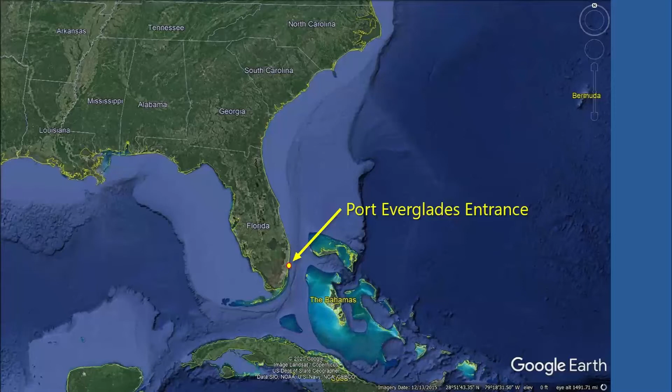So Port Everglades, for those in the room, most everybody's familiar with where this is. It's in Southeast Florida, in the lee of the Bahama Bank, so the wave conditions in this portion of the world are not quite as active as they are in other areas of the east coast of the U.S. Port Everglades is located in southern Broward County, between Fort Lauderdale and the city of Dania Beach. It is a federal navigation project that is hardened with jetties on the north and south side.

The spoil shoal is the product of a 1962 channel expansion event, where instead of going to the ODMDS or other offshore disposal features, the material was simply side cast to a site about 800 feet north of the inlet in a large mound offshore of the beach. But through time, the waves and currents in this area have pushed this rubble mass toward the beach, and it has welded to the shoreline, which is an important part of planning and developing the sand bypass project.

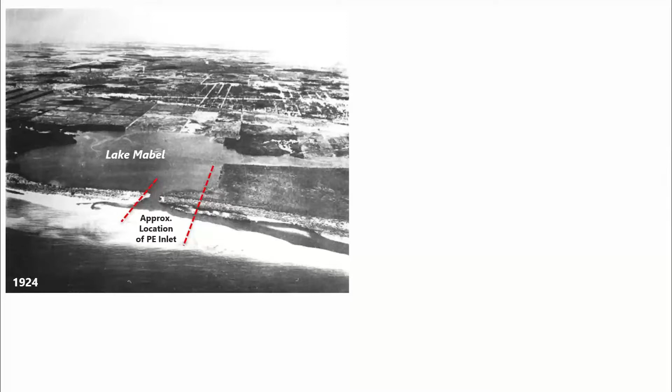Port Everglades is a man-made inlet that was cut to connect the ocean with Lake Mabel back in the mid-20s. You can see here the construction of the jetties themselves. At that time, there was an inlet to the north called New River Inlet, which closed after they opened Port Everglades. But some of these features that you see in the photograph here from 1928 are still part of the inlet infrastructure.

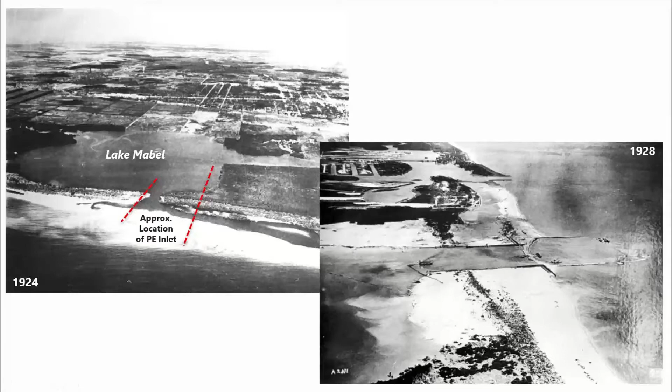So the reason for the sand bypass project is that no sand goes across the inlet naturally. Sand is accumulating on the shoreline to the north or falling into the inlet, where most of it is disposed of offshore, and no material gets to the downdrift beach naturally. So we've had an offset, with accretion to the north and erosion to the south, and we want to rectify that to the extent we can with this project.

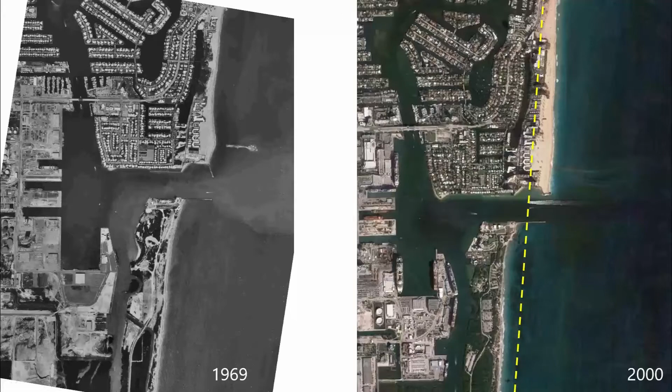So we've divided the activities associated with the sand bypass project into 3 principal components. We have a dredging component that will include several actions.

The first action would be recovery of some granite boulders that are a relic from the 1980 jetty realignment, where they didn't completely remove all the boulders that are part of the old jetty alignment within our project footprint.

Some limestone boulder removal will go to the ODMDS. But the principal pieces would be the sand trap excavation, with disposal at the ODMDS and to the beach to the north, where we're trying to place as much of the available beach-compatible sand as possible and keep it in the beach system. We believe we have the opportunity to put some of that material back on the beach to the north to accommodate the performance of the project.

And then removal of a portion of that rubble spoil shoal that was created in 1962. So these are the main activities we believe would be associated with dredging type activities, and I'll explain each one as we go on.

The next is rock work. As part of this, there's extensive improvements to the jetty. We need to extend it to accommodate some potential effects this project will have to the shoreline to the north. We want to minimize the net landward translation of the shoreline following the removal of the rubble spoil shoal and the creation of the sand trap.

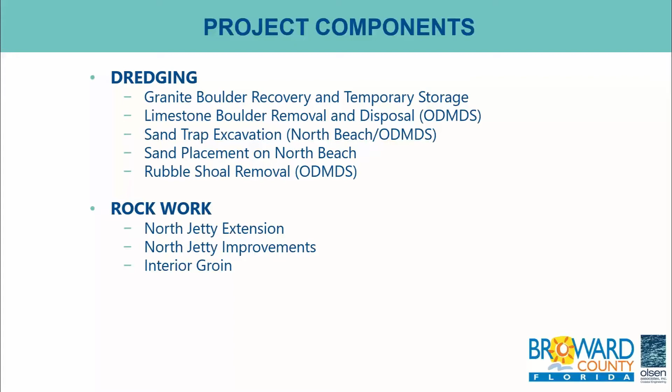We want to add elevation and tighten the north jetty. It's very porous and not very effective at retaining sand on the beach to the north. Those conditions need to be improved, and we're going to construct a small interior groin in that jetty notch. You'll see where all these pieces are relative to one another in just a second.

And then the last thing is what we're calling the environmental section. These are efforts similar in scope to some of the other things like the rock work, where we're going to need to construct a boulder barrier out of limestone rock, and about half an acre of mitigation reefs made of limestone boulders, plus some rubble clearing in that rubble shoal removal area.

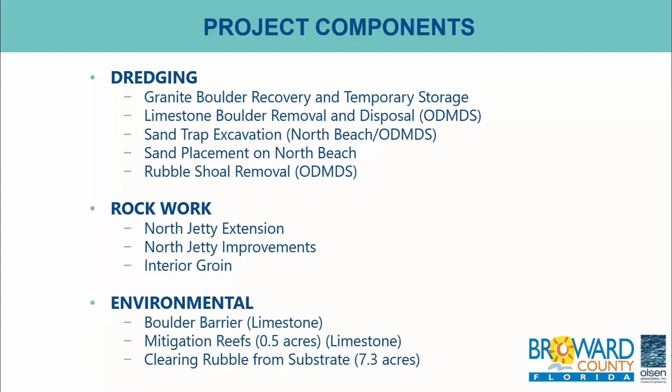We're attempting to recreate some substrate, some reef foundation that was covered by that 1962 project. We believe there could be environmental benefits associated with the project by re-exposing that substrate, and that's another part we are categorizing as environmental.

So turn your head to the left, so north is to the left now. I've flipped the inlet on its side. I'll give you a second to orient yourself - you can see Fort Lauderdale on the left, the south side of the inlet, South Jetty's on the right, and the inlet channel runs up and down in this configuration.

So this is from our plan sheets, and the purpose of the sheet is to give you a summary of all the elements. I'll quickly go through these in this format to begin with, and I'll do it in a different format next, just so we can all get on the same page with what each of these pieces of the project are.

Okay, the first thing is recover the remnants of the old jetty foundation. If you remember, pre-1980, the jetty had a southeast alignment, and they moved it to the north, to due east at the seaward tip. They removed a lot of that material to reconstruct the new jetty alignment, but left a lot of it in place, so that remaining material needs to be recovered.

There are also some limestone boulders. The source of these isn't exactly clear, and I can show some photographs of these in a minute. These boulders need to be recovered and disposed of in the ODMDS.

Then we construct the sand trap, the major feature. This is the configuration of the sand trap, and you can see it's not just a rectangular box, but has an odd shape to it, which is very purposeful for the purpose of collecting sand that will ultimately be directed toward it once we remove the rubble spoil shoal.

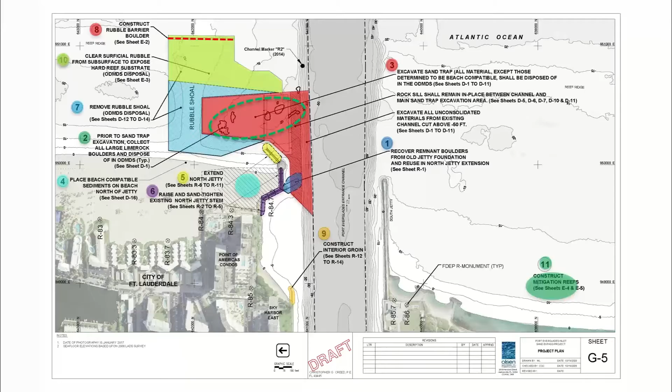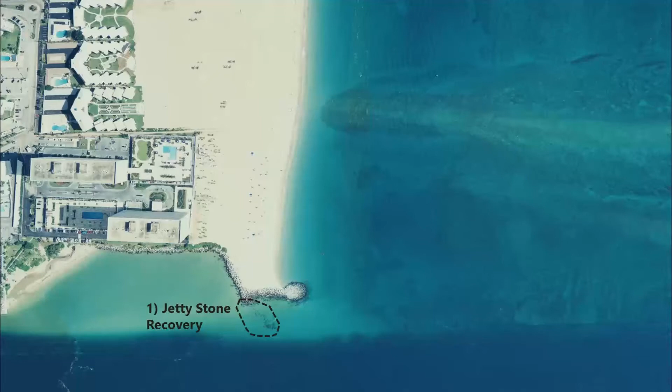So let's just run through this one more time. North is up again, and this puts it in perspective with this nice clear photograph we have. You can even see some of the jetty stones underwater there, peeking through the sand. So that's where this material is. We will want to recover these stones and reuse them. These granite stones in this area would not go to the ODMDS.

Then the limestone boulders we talked about are generally in the circles here. These would go to the ODMDS. And we build the sand trap, so you can see the purpose of getting rid of these boulders now. We have a conflict between where these existing boulders and jetty stones are and where we want the sand trap to be, and we have design elevations for the trap. So we need to clear these materials from the footprint of the area.

Beach disposal, this is the general location where we replace the sand, for whatever material is available. It's possible there won't be any sand available at the time. This is going to be an adaptive management type thing as we go into the construction process, understanding exactly how much of this material might actually be available. The O&M project may pretty much clear everything that we would have available to us.

Then we would do the jetty extension. You can see its relative location in this depiction to the sand trap. We're going to rehab the existing stones by raising the elevation and tightening them.

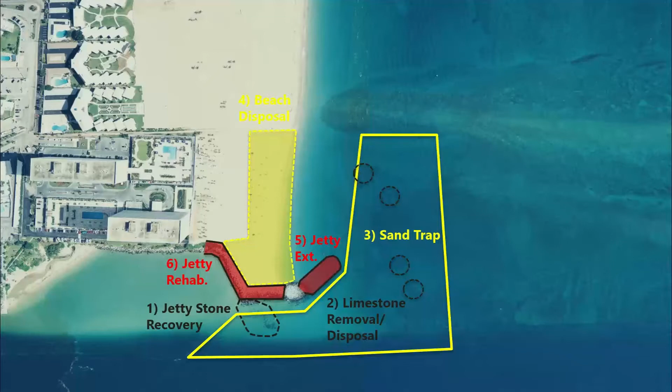So this is a nice summary of all the pieces of our project, presented more or less in the order that we anticipate they should be constructed. There will be some limited sequence of work in our specifications, but there will be flexibility on when things can be constructed. There are some goals we have with the order of work that we'll want to identify in our specifications, but we will be willing to accommodate the contractor's need for a particular order of work.

So for example, you could build the mitigation reefs first. You could build those anytime you want, because they're not in this place here. However, we would like the sand trap constructed before we construct the jetty extension. And that's just two examples.

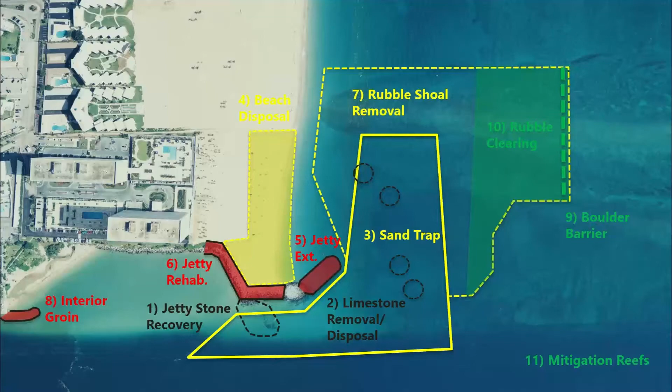So again, just some nice photographs of Port Everglades, what it looks like today. You can see the North Jetty. This is looking to the north. You can see the rubble shoal just barely underwater, the North Jetty, the interior notch, and the interior beach.

Another point to make here is the fact that this is located in a highly developed area, and an area of high use from a navigation standpoint, with the commercial port and the federal navigation project adjacent to the project area.

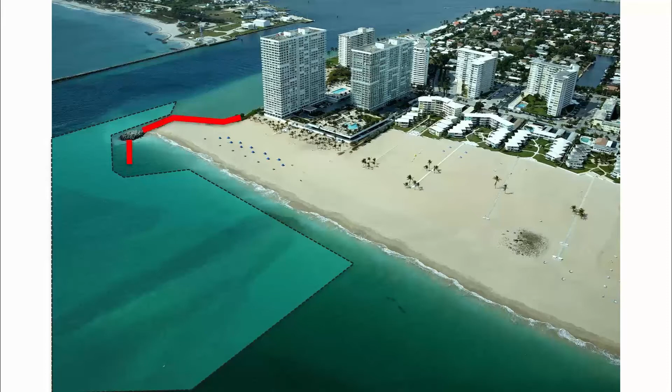So the general area of our project here, again, just another look at it. You can see the footprint of where the dredging would occur and the jetty improvements, but just to give you a perspective of how close some of this work is to some pretty highly developed areas.

So let's get into the individual pieces. I'll go into more details of each one of those things that I outlined previously to talk about our goals right now with what we want to do.

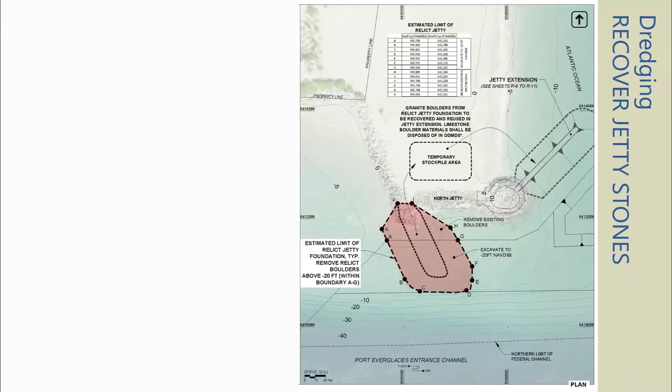So this is the jetty boulder recovery plan, and we want to recover as many of these boulders as we can from this footprint, put them in, and this is what it looks like. If you look, this is looking along the existing jetty to the west toward the port, and you can see just a little perturbation in the jetty here.

This is the old part of the jetty, and these stones would be recovered, put on the beach or put on the jetty for subsequent use elsewhere. These are appropriately sized jetty stone, and we feel that we have the opportunity to reuse this material just like they did in 1980.

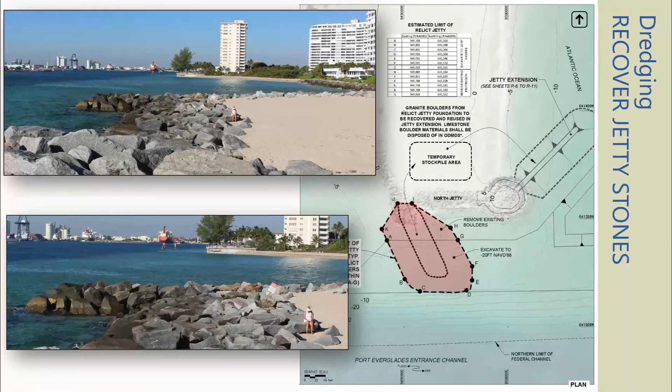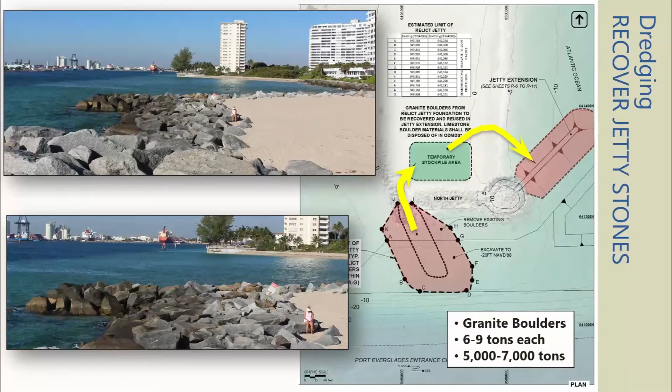So we believe there's about 5,000 to 7,000 tons of these things. Each of these stones weigh an estimated 6 to 9 tons each, and they're made of granite. We would move this material to a temporary stockpile to be determined, for subsequent reuse in the jetty extension, most likely, or other areas as may be needed.

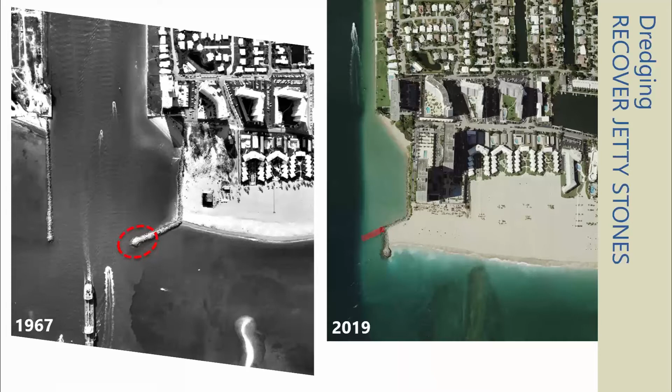It's just to give you an idea of where the old jetty stones are. This is a depiction of how the jetty realignment occurred in 1980, using a 1967 photograph and a more recent photograph from 2019. But it was that seaward end that pointed toward the southeast.

The port is to the top now, ocean to the bottom. In the 1967 photograph, you can see the spoil shoal here that had only been in place for about 5 years at the time, and had not connected to the beach. So this rubble material has moved westward over that time. It's unconsolidated material. But you can see how they repurposed these jetty stone for a more eastward alignment of the jetty at the time.

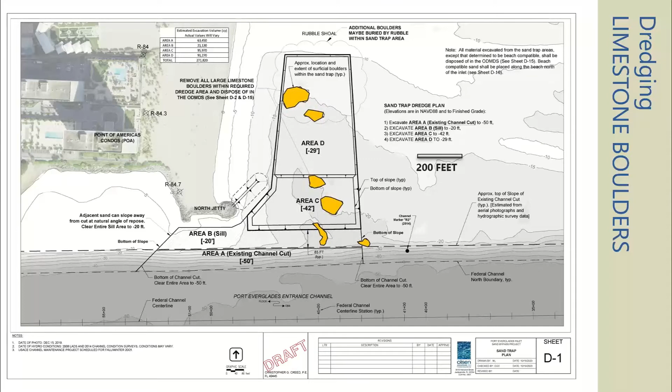So let's talk about the sand. Next to the limestone boulders, before we start excavating the sand trap, we want the contractors to be aware that there are boulders in the way that might not be compatible with the equipment that you might want to build the sand trap with.

So we have authorization to remove these boulders and put them in the ODMDS. The first step would be to collect any of these larger materials for disposal to get them out of your way. We worked with the agencies to identify that ODMDS disposal might be the most cost-effective thing to do with these boulders, and so that's what we've been allowed to do.

Just to put this in perspective, you can see here I put a scale that's about 200 feet in length to give you a sense of the size of the sand trap, just to kind of get your eyes fixed on the scale of everything we're talking about.

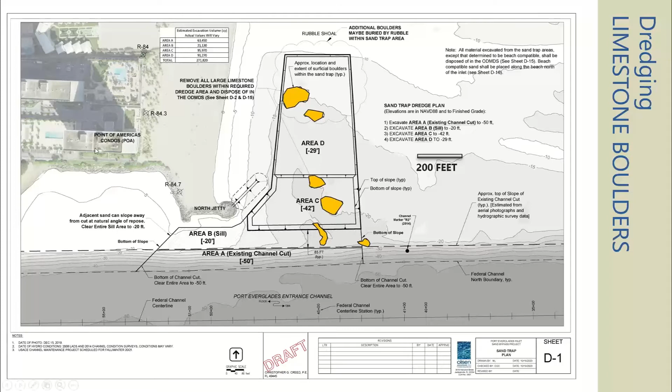So here again, you can see the Point of America's condominium over here to the left and where the sand trap will be located. Then these are some photographs of the boulders.

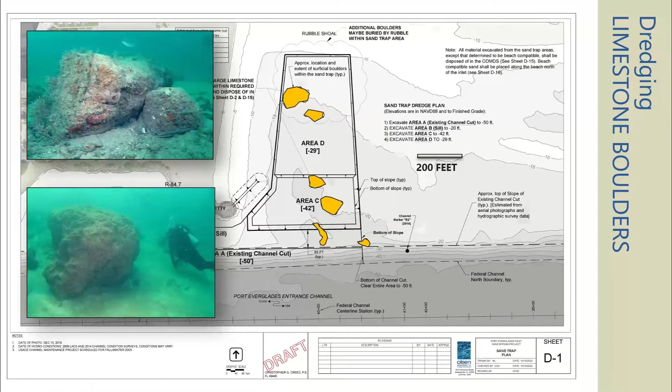All of this would go to the ODMDS. So now let's talk about the sand trap. The sand trap is not only odd shaped in plan form, but odd shaped vertically as well. We have 4 areas that we've identified in the sand trap, and they have specific purposes.

We were not able to open this sand trap up to the channel because of hydrodynamic issues associated with removing the channel wall and ship use in this channel. And so we are required to leave the channel wall in place, and we've created through design a channel wall that would remain, that we believe will be stable from a geological standpoint, for the purpose of maintaining the channel wall.

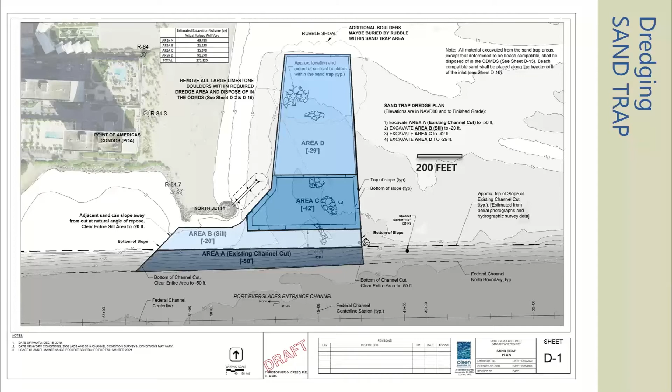And then there's an area C, which would be down to -42, and then area D down to -29. The reason these 2 areas are different: -42 is we're trying to maximize our sand storage capacity in the sand trap, but the area D to the north, we didn't dig all the way to -42 to minimize risk to the beach slipping off into a very deep area. So although it seems very odd, each of these are very purposeful footprints and elevations.

So we believe, based on the current conditions, not knowing how the O&M would affect what's going on in area A, the materials are comprised of sand, rubble, and solid rock, and we believe it'll be about 280,000 cubic yards of material. We don't think it'll be much more than that. The beach compatible sand would go to the beach to the north, and everything else goes to the ODMDS.

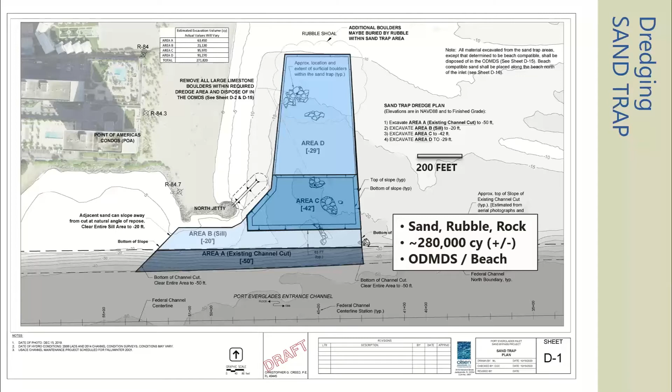Then the sill, area B, is next. Then the next sand trap area C, and then D. And further to the right is the rubble shoal removal area. We'll talk about that later. But this is just 2 depictions of what that cross section looks like of those 4 different areas of the sand trap.

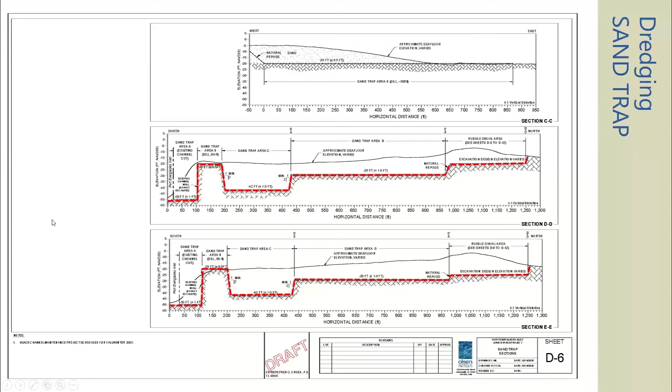Let's talk about geologic conditions. We've got a very robust data set of cores that have been taken down to at least -50 feet throughout this area. It's been a long design process. We originally wanted to blast to do some of this work because of some of the harder material at the deeper elevations. We've redesigned the sand trap recently with the goal of staying above the hardest material to make this sand trap constructible without blasting, because we were unable to secure blasting permits because of the proximity of this project to adjacent infrastructure.

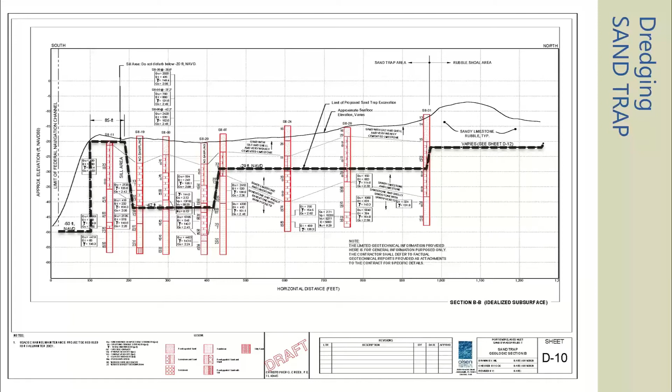But to give you a very general idea, here's again the cross section from left to right, showing the sill to the left and moving through the deeper areas, -42 to -29, from left to right. We have sand, silt, and weakly cemented limestone in an upper layer. To the far right is the rubble shoal. But all of this is expected to be mostly unconsolidated material that would be easily excavated.

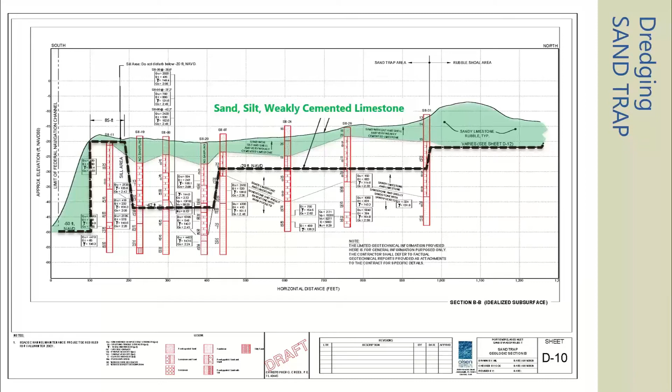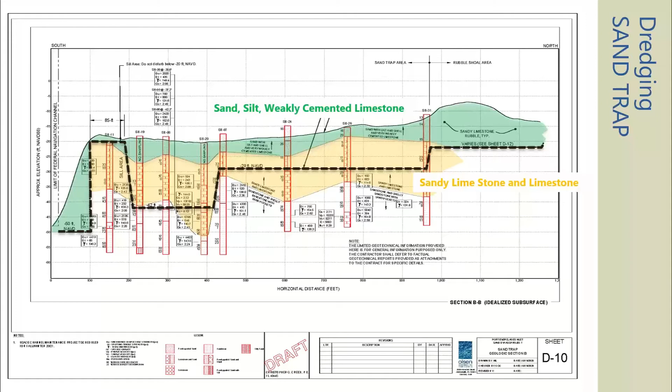Then we run into a zone where the rock material is consolidated, and it will take breaking to remove this material. Mostly sandy limestone and limestone, and relative hardnesses are not quite as high as exists at the deeper depths. I won't get into the hardnesses right now, but just know that as we increase in depth, we do increase rock hardness.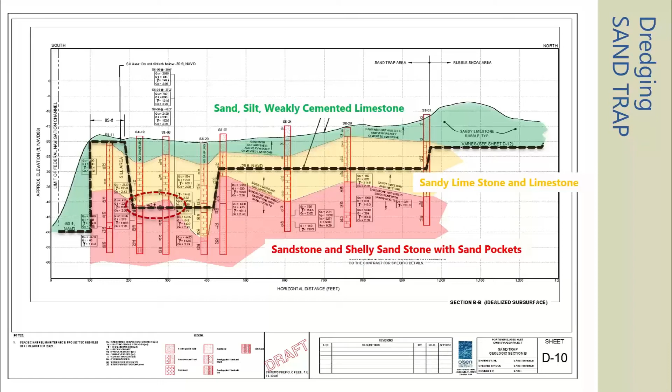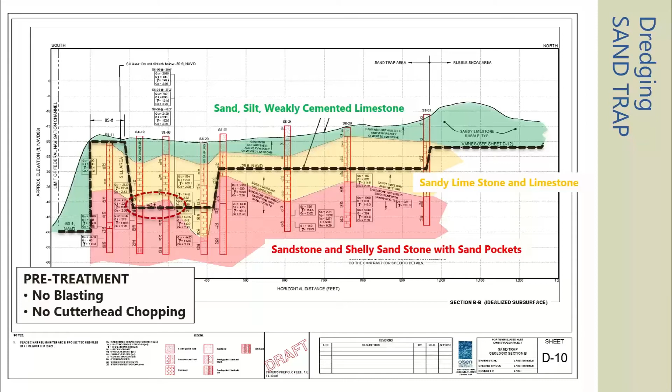There will be no pre-treating any of this material using the techniques of blasting and cutter head chopping. Blasting, we couldn't get permits for, and ultimately the National Marine Fisheries Service put a prohibition on cutter head chopping of the material without the hydraulic pumps of a hydraulic dredge engaged, should that be the type of equipment you choose to use. So we fought that one, we lost, but those are the pre-treatment methods that cannot be used for the project. But others, such as limited punching and drilling, are still on the table.

So just to give you an idea of the scope and area of extent of where we believe there to be beach compatible sand that would have light rubble in it, that would take some screening to make sure that it is beach compatible, that we don't put unacceptable material on the beach to the north. We believe there would probably at the time of construction be 10 to 30,000 yards of this stuff, and it would be placed on the beach to the north.

And you can do that by mechanical or hydraulic means, or whatever way is best, and just push the material around. For example, moving it around with off-road trucks and things. But it's a pretty limited amount of material. But we are trying to preserve to the extent we can beach compatible material that is available to us in the beach system. So that is our goal.

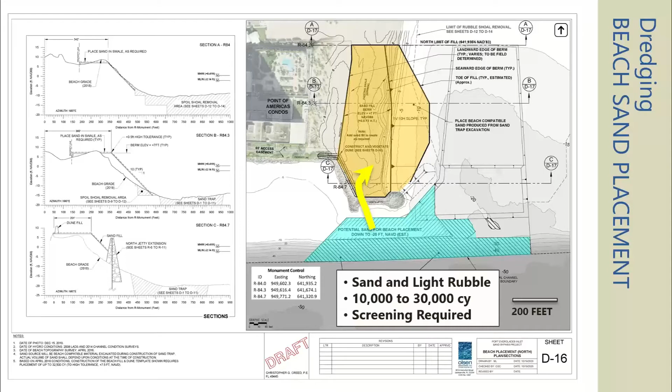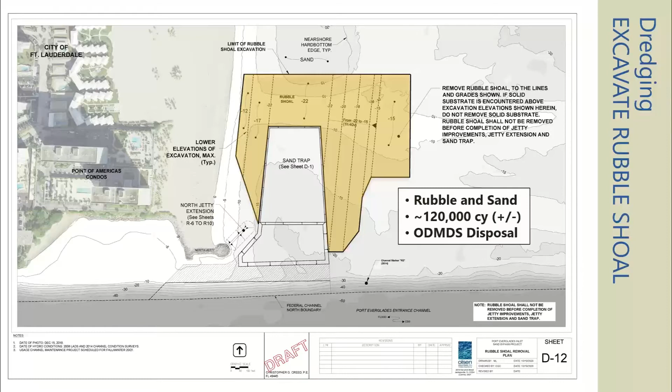Rubble, I'm doing this a little bit out of order in terms of how I explained the order of work earlier. I'm sticking with the dredging activities first. So here's the rubble removal. What we intend to do is give the contractors design elevations for the rubble removal based upon what we believe the seabed looked like before the rubble shoal was put in place. We expect there to be 100 to 120,000 cubic yards of material encountered in this footprint, and all of this material will go to the ODMDS.

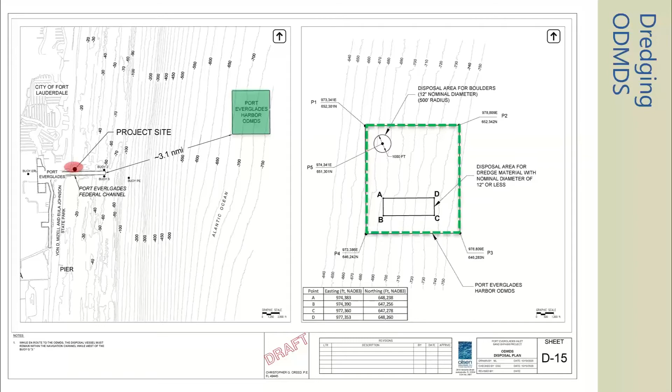So the ODMDS, just speak to that for just a second. It's the existing Port Everglades ODMDS, which is a little more than 3 miles past the sea buoy at Port Everglades, which is available. Our current disposal plan is for the boulders to be disposed of in a small area in the northwest corner of the ODMDS, with everything else to be disposed of in a drop zone on the south side of the ODMDS.

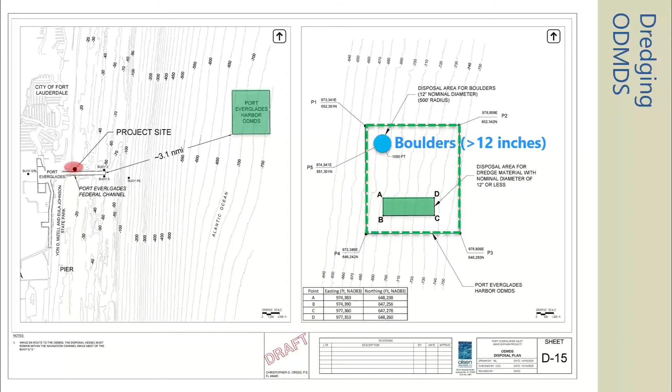We've had some recent communications with EPA. It's possible that they're going to eliminate the boulder site and just let us put everything in the southern drop zone, and that would be preferred in my opinion, so we don't have to sort this material. But we will have that resolved before the bid is advertised. But this is what we have right now in our existing permit. So let's move on to the rock work. I think there might be a question, and I will address these at the end.

So with the rock work, we'll start with the jetty extension, and we want it to be sand tight. It's going to have a center that is made of steel sheet pile. So the first thing will be putting in about 120 to 150 feet of steel sheet pile. Then a stone-filled marine mattress as the foundation of the structure. Then the riprap armor stone would be placed with typical side slopes of about 2 to 1, in a very typical riprap type configuration, similar to the existing jetty.

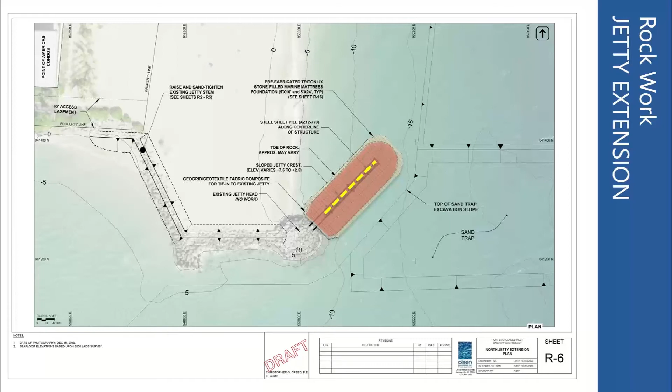This gives you an idea of the steel sheet pile, where it would be located. There will be some accommodations. We have some top of rock elevation along where we think the sheet pile is going to go. Estimated embedment depths into that rock. Again, this is more the unconsolidated area. Possibility of encountering some of these old jetty stones here, and we will accommodate that should that occur with the installation.

Then you would put in the marine mattresses, and you would put the riprap armor stone on top of that. And these are typically, we believe, to be about 6 to 10 ton stone, similar to what we've had in the existing jetty. About 15,000 tons of stone to do this. 15,000 tons of stone, 16,000 square feet of marine mattresses, and then this would all be specific gravity 2.65, so granite or equivalent type rock.

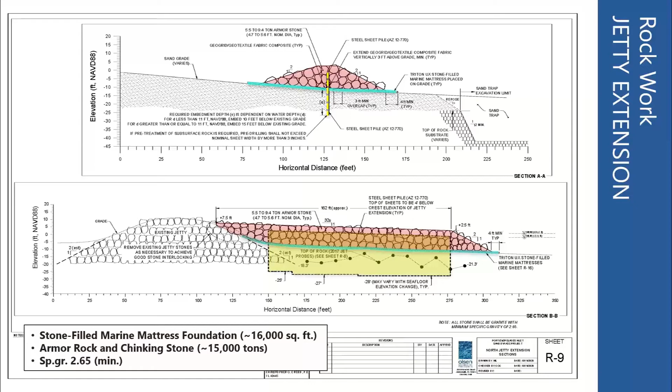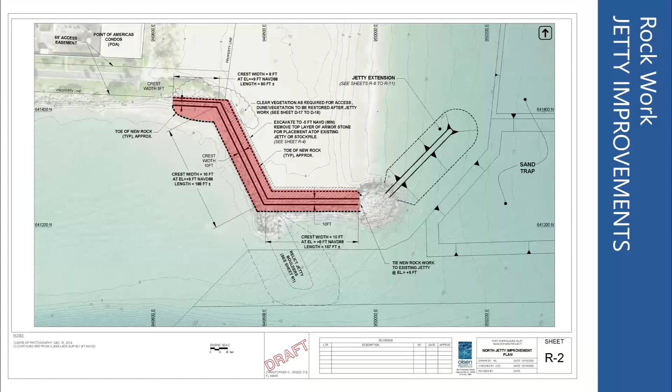Then we go into the jetty improvements. This is where it's going to be located. It's going to be seaward of the Point of Americas at the landward termination of it, and it's going to affect the 2 east-west portions and the 1 portion of the jetty that goes to the northwest and southeast. This is a little complicated to explain. I want to give you an idea.

We intend to basically manipulate the existing jetty stone and then put in an impermeable sand type core using geotextile and geogrid composite materials, and backfill it with new stone. And this is what we've put in our plans with the sequencing of how this work would go, to instruct the contractor on how this would be done. We would also give you the stone sizes as well.

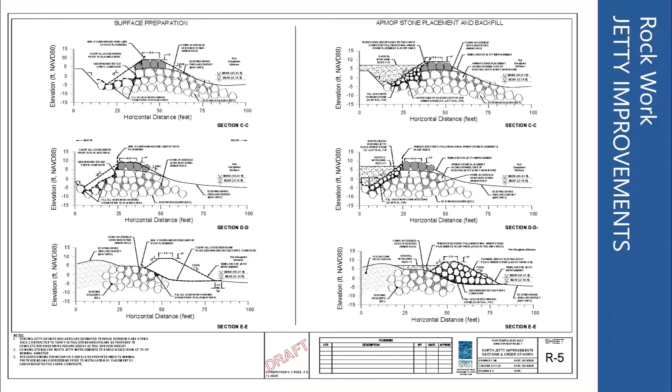These stone sizes are going to be a lot smaller than what we need for the jetty extension, and more manageable to deal with. And we'll talk about how you'll be able to stand on the beach to the north to do this work. I have an access slide later in the presentation.

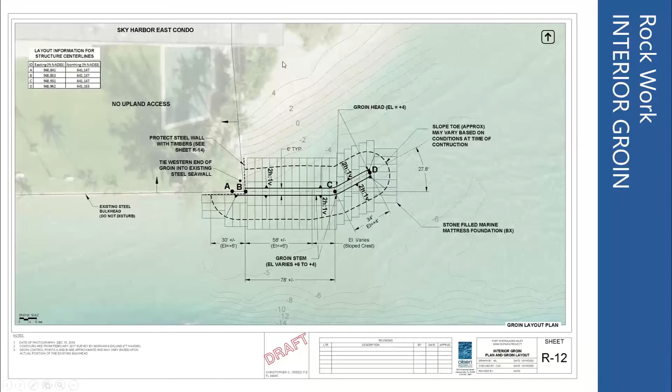So the interior groin, we've really zoomed in here. North is up. You can still see the existing steel sheet pile bulkhead here. That's some of that original infrastructure that I identified in that history slide from the 20s. But this is the small beach to the top here. And this is where this small groin would be, and it would all be constructed from the water side. And so there would be no access of equipment or materials on this beach.

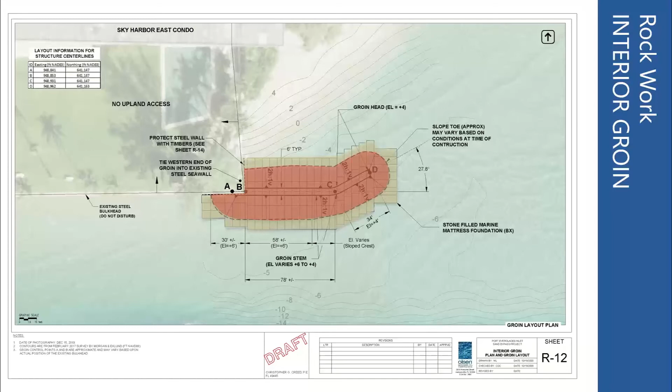We put in, again, a stone-filled marine mattress foundation, and simply put a riprap armor stone, chinking stone composite mass on top of the mattress materials. Pretty simple, really. Put the mattresses in and build the structure. This is just an example of what the marine mattresses look like for those who may not be familiar with this. This is from an application in South Carolina a few years back.

This is the BX mattress from a vendor called Tensar, where you have specific specifications on how these mattresses were to be assembled. There's handling instructions and installation instructions. But once they're fabricated, they're actually pretty easy to install. And they retain their position in place once you put them in. So we've added these mattresses not only for the stability of the structure, but it also is somewhat easier to construct compared to other foundation type applications.

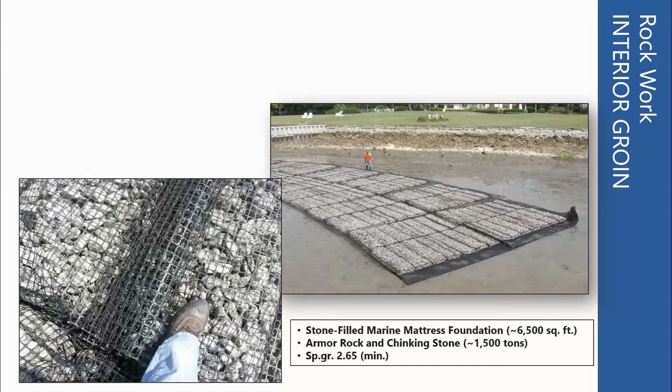To give you an idea, that's not my foot, but it's someone with a foot about the same size as me, of what the grid composite material looks like that's used to make the mattresses, and the size of the fill stone. And the vendor who provides this product has lots of information on how this is to be assembled, and it's possible that they can also provide the product assembled for you, and you simply just have to have it delivered and put it in. And then again, it would just be a stone mass that would be the ultimate form of this interior groin, much like the other jetty work.

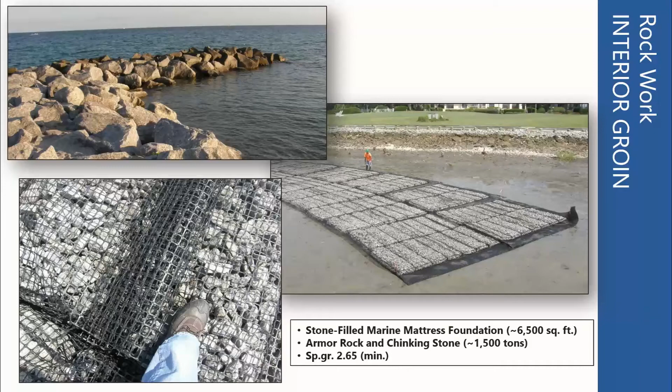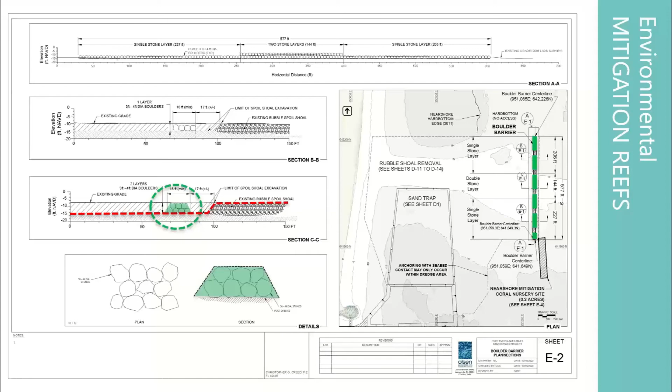You can see in this photograph this is currently one of our mitigation sites, the 0.2 acre mitigation site. We would put the boulder barrier, a line of boulders from north to south in a straight line, with a single layer in some areas and a double layer in others, within the footprint of where the rubble shoal had been removed. We would put the boulder mass there, depicted with the green shading, in a trapezoidal configuration to the extent you can get it, giving dimensions of height, width, and length. You basically stay in the footprint, put the boulders there, and accomplish the mission.

Rubble clearing happens once the boulder barrier is in place. This is also why we put this in environmental review - we don't believe this activity would be effectively accomplished with the dredge, but it could be; that's up to the industry to figure out. Our goal, once the major mass of this portion of the rubble shoal is removed, is to have a follow-on activity clearing residual rubble from this area, and to the extent we can, re-expose the pre-existing hard substrate beneath it, so colonization of coral communities can become reestablished. This is a pretty unique aspect of the project. We'll put performance conditions on this, and it'll be up to the contractor to select the approach they want to use.

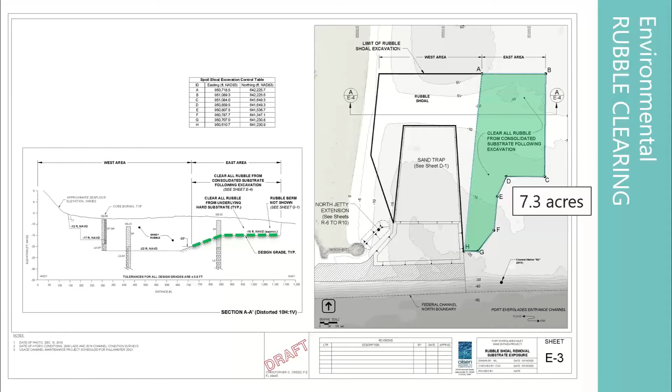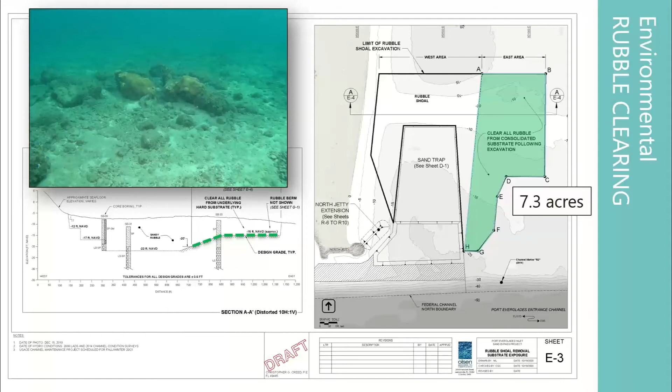This is the type of product we're looking for. You can see there is still some rubble in the picture, but there are areas of hard substrate where there is no rubble. So it's not a matter of clearing all the rubble, but getting as much of this material out of the system as possible is the goal.

So the mitigation reefs - one of them is within this footprint closer to the inlet. We might relocate this, we haven't decided, but understand both are water-based activities where you're bringing boulders in, likely from a barge, to build a 0.2 acre reef at the shallow water site, and a 0.3 acre reef at the deeper water site in about 40 feet of water, a total of 0.5 acres. They're relatively small, and the purpose of these boulder reefs is for coral relocation and coral attachment eventually - not massive mitigation footprint, but structures used subsequently for coral rehabilitation activities.

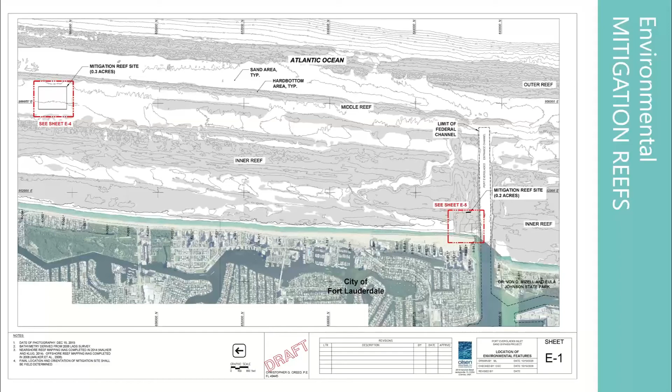To give you an idea, it's going to be a mass of rocks. If you look at the top left, this is the box offshore, at about 45 to 50 feet. That's a very big box, and we're only going to build 0.3 acres in this box, so we will tell you exactly where that goes. The plan would be: prepare to put 0.3 acres of boulders in this box, and we'll tell you later exactly where they go.

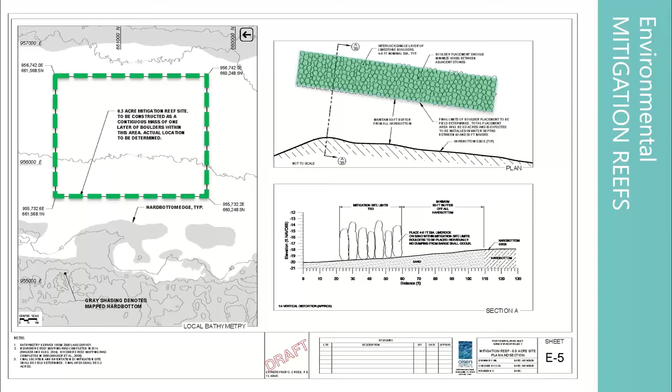Should be relatively straightforward. The performance criteria for this will be to make sure it's as close together as it can be. The type of activity you would expect is barge-mounted operations with a crane, putting boulders in the water as close together as you can. That's pretty simple. This also applies to the boulder barrier I explained as well.

So let's talk about access for a minute. Our access here is very limited, which is another complicating issue for this project. We do not have access from the upland for equipment or materials, so the contractor needs to be prepared to bring everything in by water. Dredging is clearly a water-based activity, but given that we need to do jetty work on the beach to the north, there would be sand placement activities, sand screening possibly, and other activities required on the beach to the north. The material to accommodate that would have to be delivered by barge to the work site.

We have a footprint - you can see in the orange here - this is the area available to you where you can stage, store, operate work, and perform any activities on the beach to the north.

It's relatively robust in size, about 200 by 200 feet. There's the larger piece to the east and a smaller piece. The reason it's smaller is this is a jetty access corridor, and it may extend even seaward. We may be able to make this shaded box a little more robust to accommodate jetty activities, but that's something we need to look into. The sand placement activity would go in the green box, which is the access area. Once you're on the beach, you're not highly constrained.

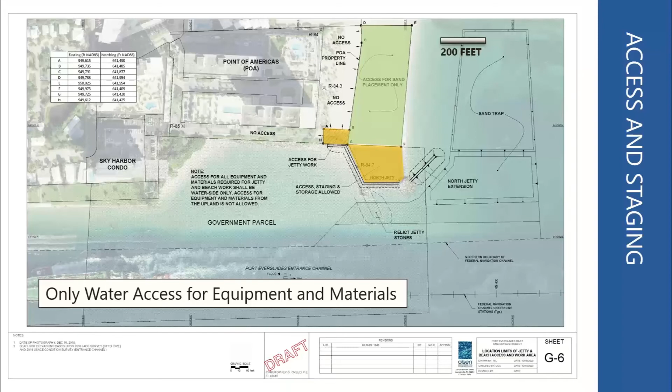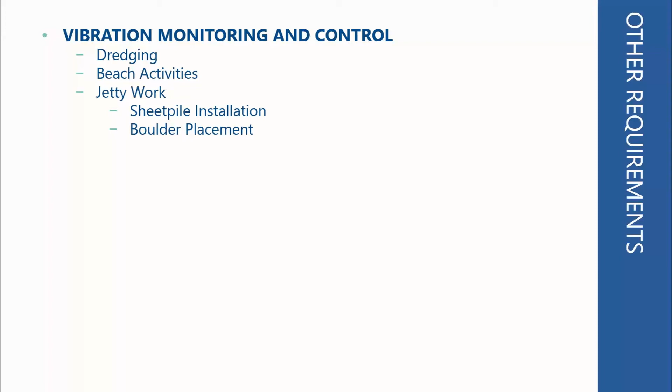Other things, clearly, given the location of the infrastructure adjacent to us, vibration monitoring and control is important. That will be required for dredging, beach work-related activities, as well as other jetty work, to ensure we're not causing unacceptable vibration levels, particularly to the condominium, which is immediately adjacent to our work site and other areas. That will be a requirement.

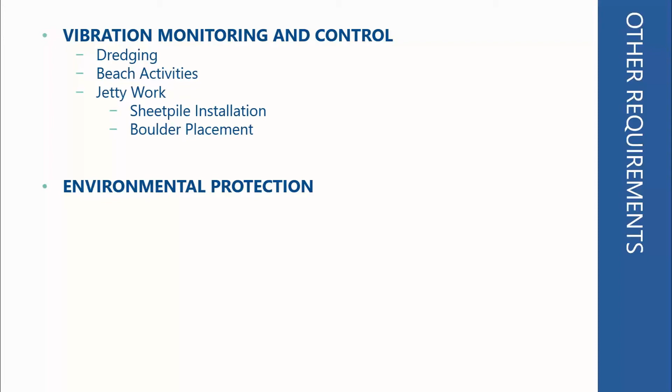And then environmental protection—I want to quickly summarize what you will be expected to do and explain other aspects of what will be going on during the construction process.

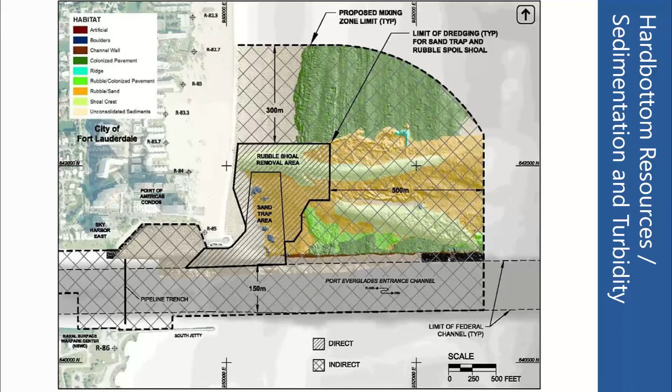This mixing zone is fairly robust, so you do have some room. The criteria is 29 NTUs at the edges of the mixing zone, but we also have other thresholds within here, should we exceed sedimentation levels or something. There's an adaptive management protocol we'll have to follow during the course of dredging, which could control how you operate when dredging particular areas, particularly when we're very close to the resources.

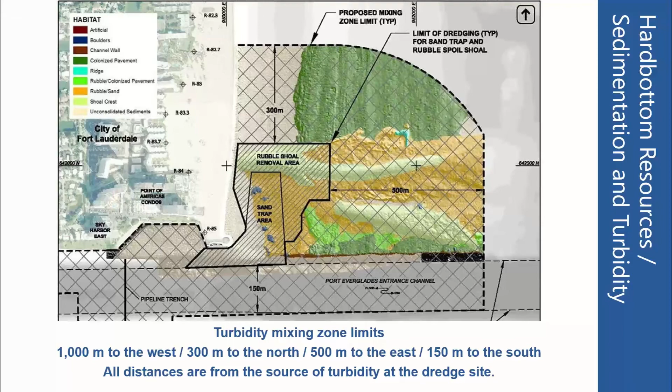It extends about 1,000 meters to the west in the channel, 300 meters to the north, 500 meters to the east, and about 150 meters to the south. Those distances are relative to where the dredge is operating, or where scow filling activities as well—anywhere you're producing turbidity—will be monitored.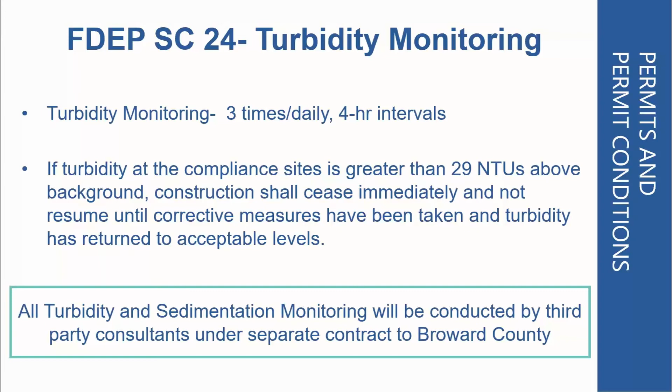Sedimentation and turbidity monitoring will not be required of the contractor. That will be conducted by third-party consultants under a separate contract with Broward County. They will monitor water quality and sedimentation levels, reporting back in real time to the county, the resource agencies, and the dredging contractor on what those turbidity levels are and how they might need to change to protect the resources adjacent to the project area.

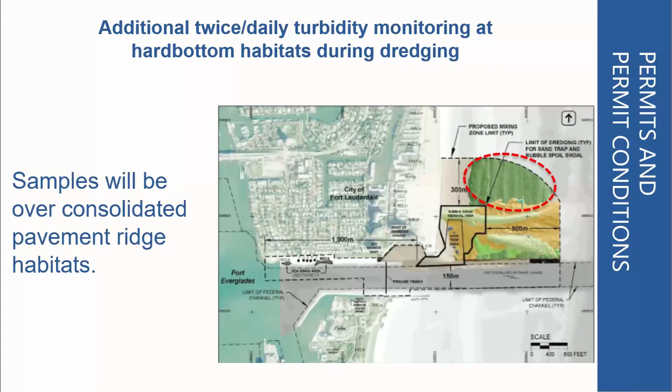Most of the sampling focus will be over the consolidated pavement area, the area of interest. Given the small scale of this project, there's only a small period of time when this will be most problematic, except maybe during some odd times of an outgoing tide. For example, we wouldn't expect many problems at all should there be an incoming tide.

So they'll be monitoring the densest portion of the plume within these areas and over the consolidated pavement, with divers in the water daily looking at sedimentation impacts and accumulation to create feedback for the dredging contractor, should we need to alter dredging operations for a short period of time—for example, only dredging on the incoming tide for a few days to see what happens, or other types of activities.

Clearly, we would be interested in and welcome the contractor coming to us, should there be problems, with ways that we manage these criteria we're faced with to protect these resources.

So I would invite all those interested in bidding this project, the dredging contractors—this material is available online with the Corps at this point. Our permits have been issued, and the biological monitoring plan and our biological opinion from the National Marine Fisheries Service are available, with a lot of this criteria already outlined on what we need to do and what our third-party consultants will be doing to monitor and track sedimentation and turbidity over these sensitive resource areas.

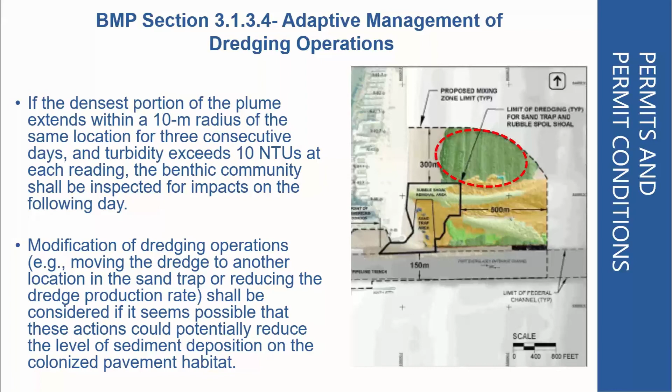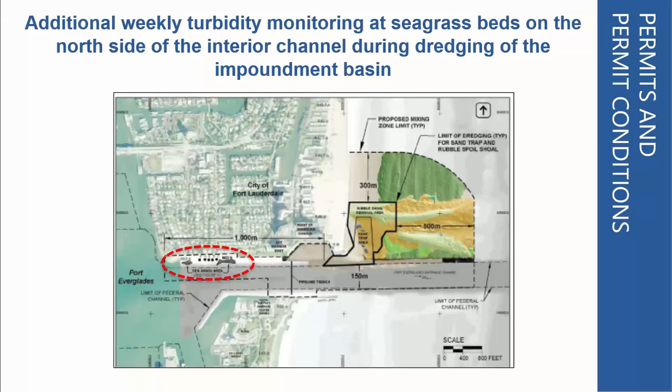There's also some seagrass beds to the interior, which we're not as concerned about, but we do have to monitor them. Should there be problems on the seagrass beds, we would need to accommodate some type of change to the activities to alleviate those effects.

Our goal is to build this next year, but the contractor should be aware there will be prohibitions on dredging of the sand trap and rubble shoal—not the other activities like boulder removal, jetty construction, or mitigation construction. Essentially between July 21 and September 14th there's a no-dredge window because it's coral spawning season for a lot of the corals offshore, particularly the acropora species.

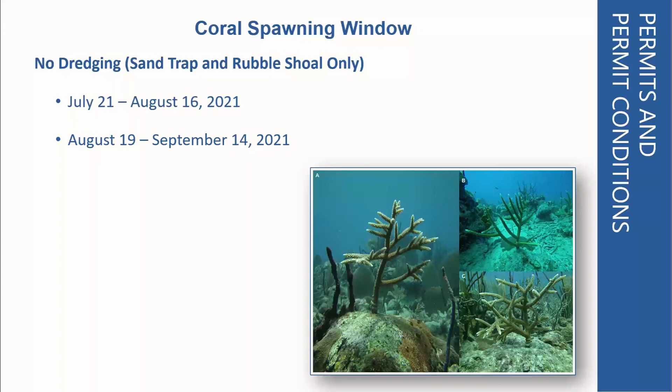So that's the summary of the project. I'll open it up to questions in a second. I see one, but I'm going to turn it back over to Stacy, and then we'll have questions.

Our goal is to start construction sometime next summer, and we will give a very robust construction window, understanding that we have prohibitions like the coral spawning season and things like that, and just given the complexity of this project.

I'll finish here with a funding statement. All the funding is secured, and if Sam wants to speak to this more when I turn it back over to these guys. It is secure, and it's a local project—the federal government is not involved. This is not part of the federal navigation project or the federal shore protection project.

This is an initiative by Broward County, as Sam mentioned, as part of their resiliency program and their comprehensive beach management program in the county. Our current operating budget, what we believe to be our budget at this point, is right around $30 million for all the activities associated with this project.

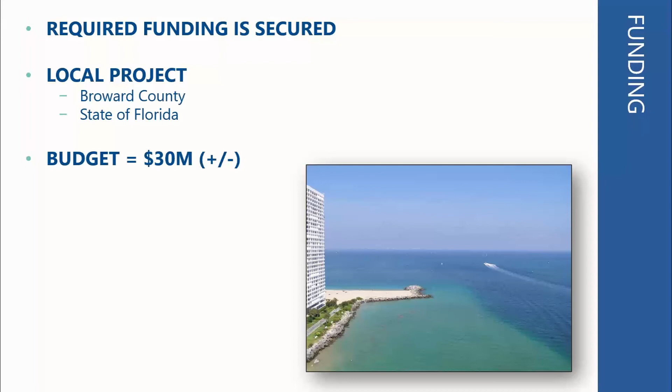So with that, I will turn it back over to Stacy and let her wrap it up, and then we can move into questions and comments should there be any. Well, Stacy, if you give me just a second, I will.

There's one question: why dispose of the large boulders in ODMDS as opposed to a shallower mitigation reef area? We were not required to do that by permit because of the potential complexity of having to grab those boulders and move them. But if a contractor proposes it's easier to just move these, we would need to know that and could possibly incorporate it into the plan—we're just not requiring it as an activity. Everyone seemed to think it would be easier for the contractor to recover and dispose of them, and the resource agencies agreed. So that's it for me.

Okay, great. Thank you, Chris. I'll start—again, this is Connie Mangan, Purchasing Manager. I'm going to do a high level overview of solicitation requirements. Again, this is a pre-advertisement meeting; the final bid has not been issued, so this is high level. The bid will have the final requirements, but we're trying to give you some advance notice regarding it.

It's expected bidder qualifications will be included for the prime, requiring previous experience with similar dredging projects of size and nature, and also the prime will be required to have subcontractors with previous experience in major subcomponents—for example, the rock jetty work.

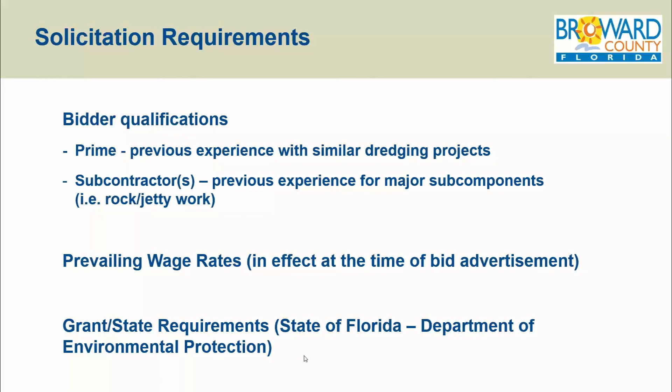The solicitation would be requiring a bid bond of 5%. Vendors have two ways in which they can get the bid bond to our purchasing division. You can either use Surety 2000, or you can mail the bond to our Andrews Avenue address, which will be stated in the solicitation. The recommended bidder for award will need to furnish a payment and performance bond, and on our purchasing division website, you have the payment and performance bond forms available to you.

Some of the insurance requirements are listed in the bulletin before. I just wanted to point out for this specific solicitation, we have the protection and indemnity and collision liability for watercrafts. As Chris mentioned, for transportation a lot of it will be through the water, so that's very important. The final insurance requirements will be made available in the solicitation documents. Please review that, and you can submit your certificate of insurance with your bid submittal as well.

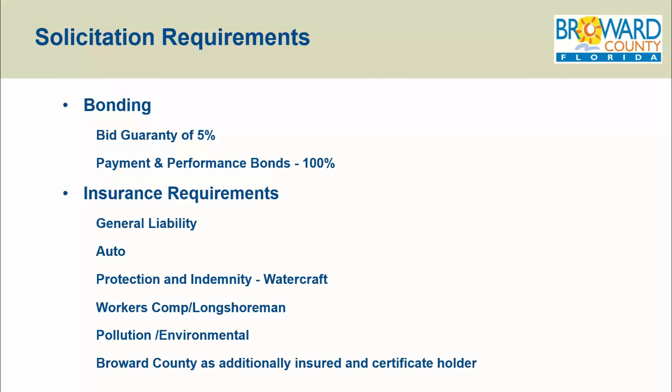There's also expected to be goal participation requirements. Broward County, through its Office of Economic and Small Business Development, certifies local firms that are referred to as Community Business Enterprises. The percent will be included in the advertised solicitation, though I believe it's been set at 2% of the bid amount, which will be required for vendors to use a Broward County business enterprise firm. You can actually look at the firms in the certification directory. We've included the page there, but go to broward.org and look for Office of Economic and Small Business Development. Through their website, you can look for certified firms. Again, you're looking for Broward County CBEs.

Also in the solicitation, expected to have workforce investment, which is a program by Office of Economic and Small Business for hard to hire or disadvantaged workers. Additionally, any security requirements if vendor is accessing Port Everglades, that would include either background checks or TWIC cards.